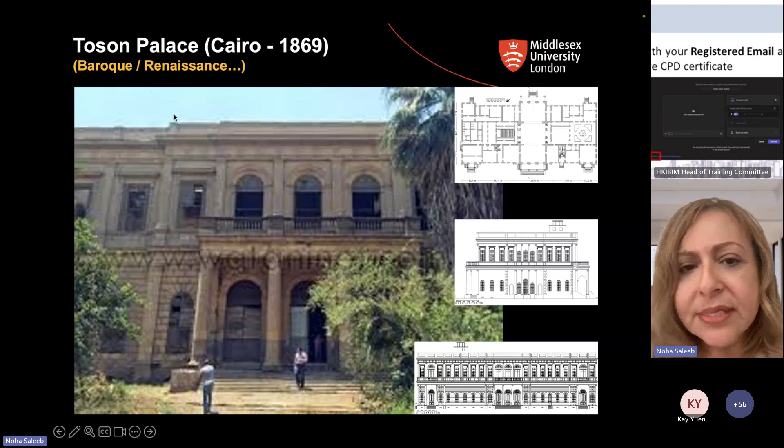And these are just a few pictures of what the palace looked like when we received it. As you can see, it was in shambles. It had been affected by a terrible fire in the early century, and parts of it were completely demolished.

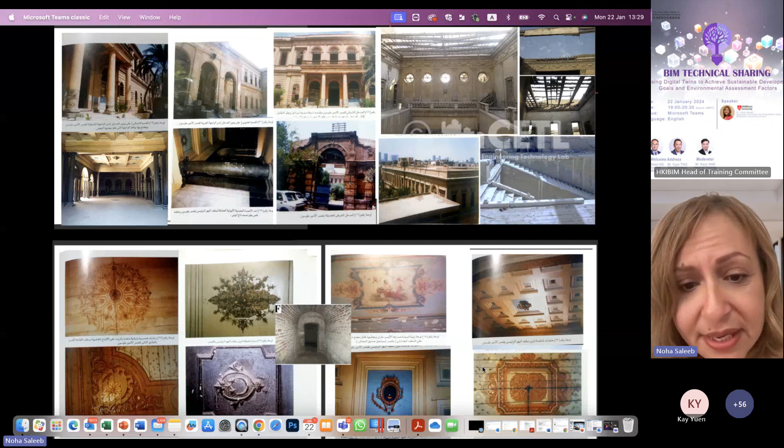Internally, these are examples of the works that are inside it, but a lot of them needed huge renovations.

In addition to that, we had other problems. We had bats and snakes inside the building, deteriorating structures. There was no privacy at all in the building—it was being used by neighboring buildings, and there were huge problems there. So we were basically asked to help enhance all of that using BIM and digital twins.

So how did we go about creating a digital twin? I have written here heritage digital twin, but this is actually the process that I would use to advise people if they want to create a digital twin on any project, whether new build or not. Now, this is a process that we went through, which was pretty cumbersome.

So it had stages to it. First of all, how do you go about defining the IoT sensors that you're going to use inside the physical asset, and how do you connect them in the physical asset? That's a big thing. And then, what is the technology or process used? What software and hardware systems are you going to use? What data are you going to collect? How then do you analyze that data? And how then do you make decisions based on that data and return it back to the physical asset?

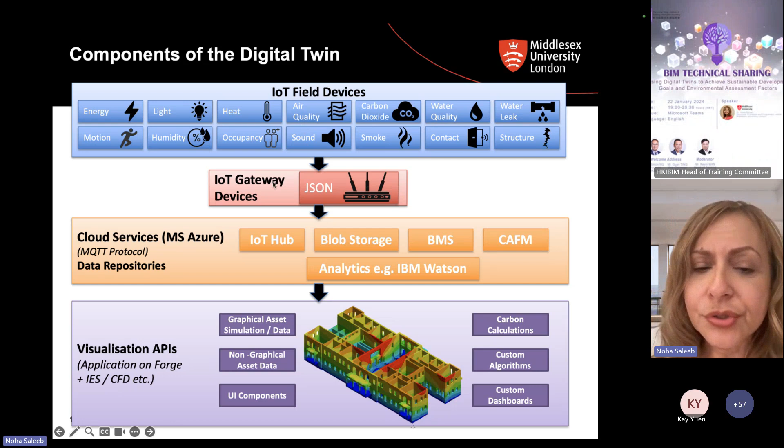But we also made sure there was a feedback loop, so there had to be connectivity back into controlling maybe the lights or the HVAC systems available inside the palace itself, controlling the shades on the windows and so on. These are examples of where we connected the devices inside the building. It was a process we had to go through because we had to decide whether these would be remotely controlled or not, whether they'd have the opportunity to be battery charged if the electricity supply went out for any reason in the building.

What Wi-Fi system are we going to use? Is that going to be local, or like global bandwidth? So we had to go through all of these decisions. Are they going to be connected to a hub on site, inside the walls, or outside the walls? Of course, inside the walls is pretty problematic if you're dealing with a heritage building, but it's fine if you put it into consideration during the design phase of a new build. And hence why I was saying that digital twin can start earlier than the operations phase.

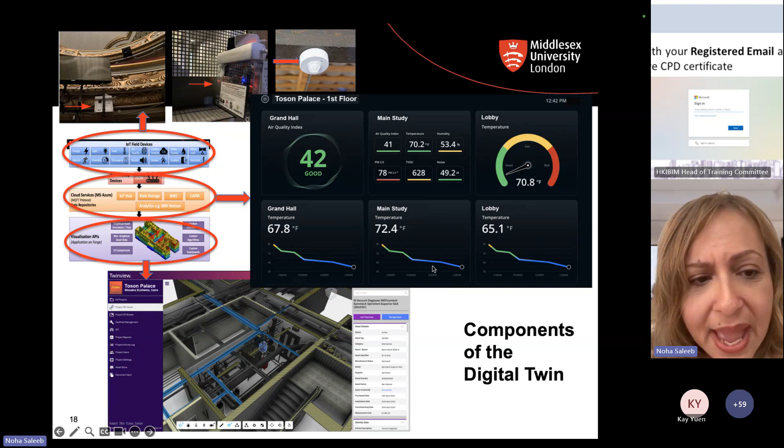These are examples of the interfaces that we had, both graphical and non-graphical. Now I go on to my final part, which I'll probably spend a bit more time on: how we aligned all of that to the UN SDGs. Please feel free to ask any questions, either in the chat or verbally at the end. I'm happy to take any questions.

Let's go back to the 5 main goals I mentioned at the beginning: optimization of the asset, simulation of the asset, the social data of the asset, the management and operational aspects of the asset, and health and safety of the asset. These were the proposed aims or outcomes, but what were the tangible outputs we were expected to produce? In order for this to happen, we created a new heritage classification system, which is non-existent at the moment.

Those of you who deal with technical issues in graphical models probably use classifications like Uniclass, Omniclass, SFG20, COBie. There are many different ones out there, but none of these are suitable for heritage, as I'm going to show you later. So the first thing we created was a classification system useful for heritage.

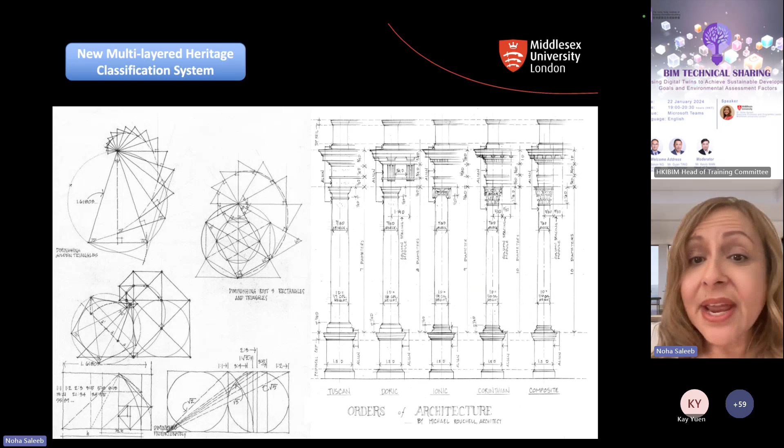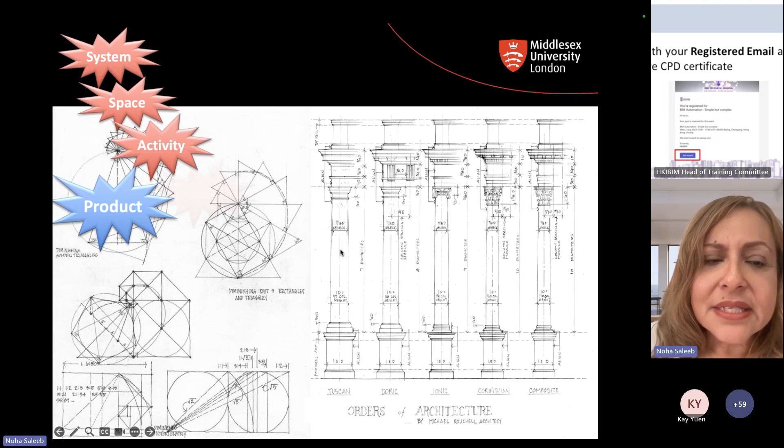Currently, classification systems have the system, the space, the activity, the entity, the complex identified within them, like in Uniclass or Omniclass, in the form of tables—system table, space table, activity table.

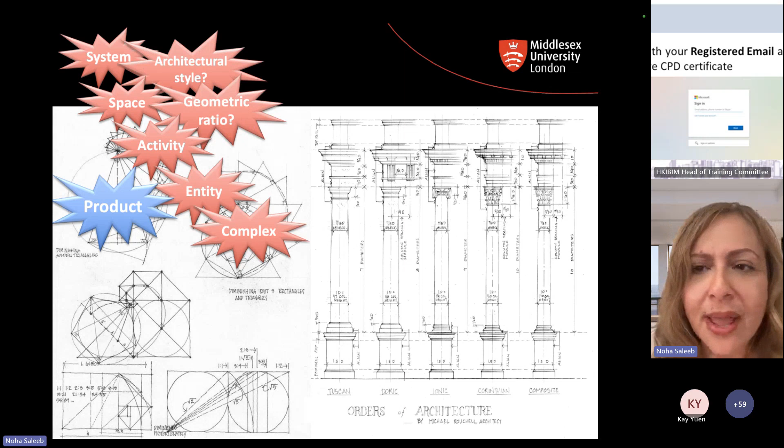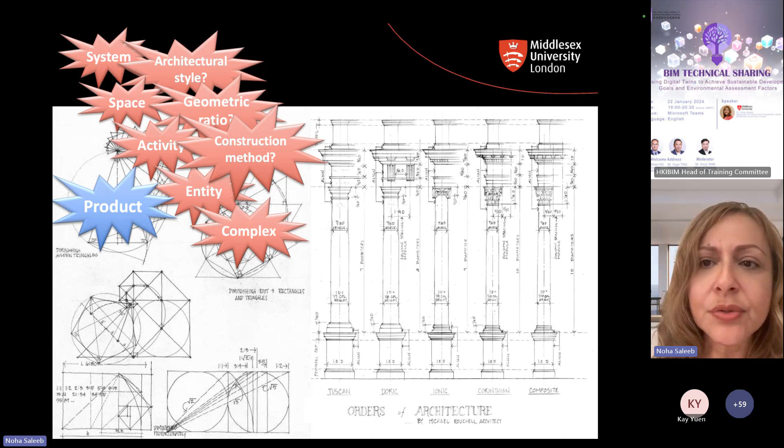The cultural value, the condition—if you want to replace a particular piece in a heritage building with another, you cannot get a piece that's in a completely different condition, from 500 years later, for example. So all of these are examples of attributes that do not exist in current classification systems.

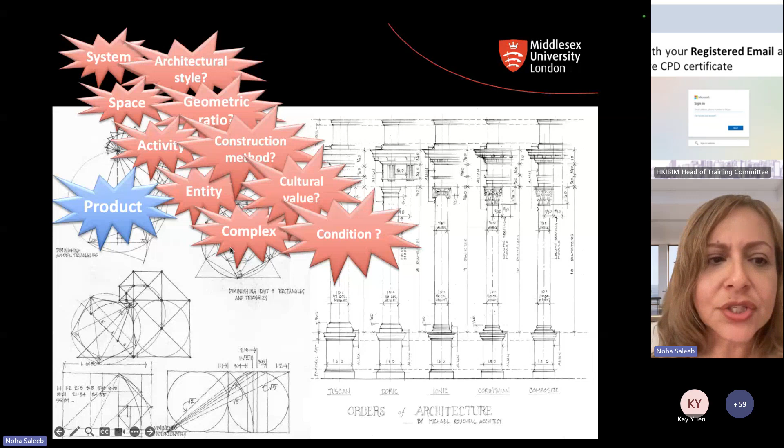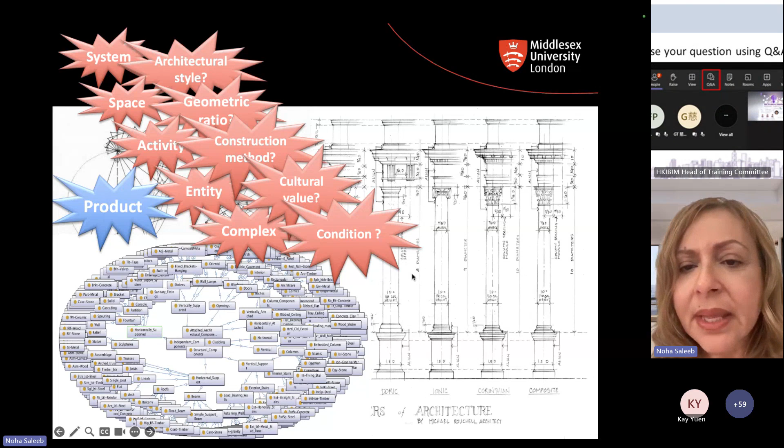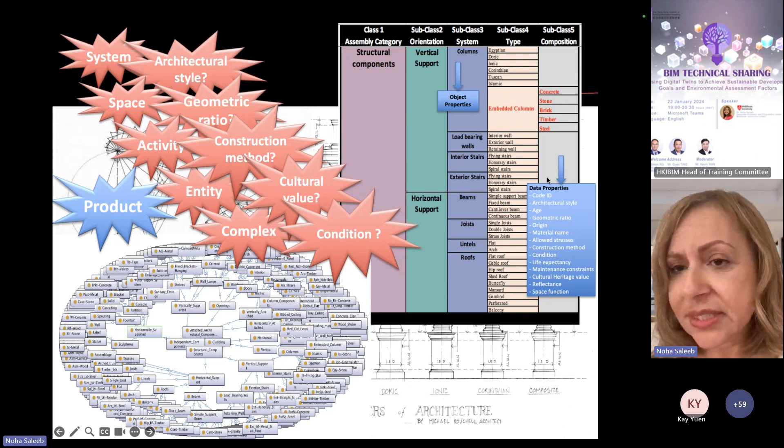Hence we produced a classification system. What you see here is just a representation of the connections between its different classes, and this is it opened up in tabular form, with examples of the data properties we included inside those tables.

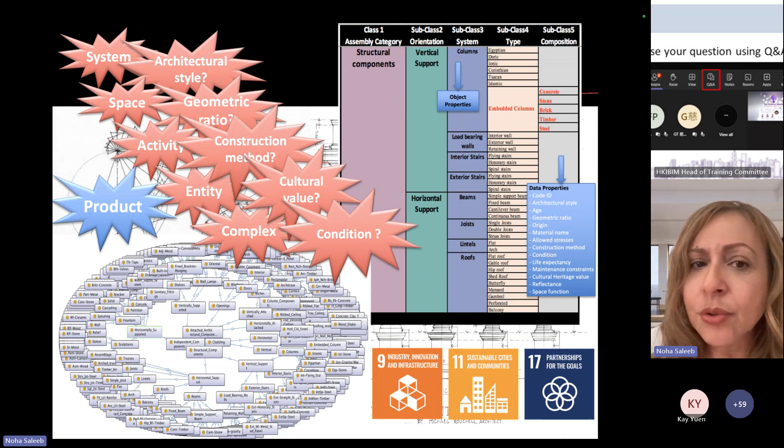We found that this helps us achieve these 3 sustainable goals. It's definitely an innovation, it's definitely used for infrastructure, and it helps us achieve sustainability, because part of these properties relate to sustainable aspects, like the carbon footprint of a component, or the condition and how that connects to circularity. It also helped with partnerships, because we were in close contact with the Ministry of Antiquities and their archaeology teams to help create and manage it.

Let's go on to the second and third outputs, like a framework for structural analysis that we created, and the simulations, virtual reality, and so on.

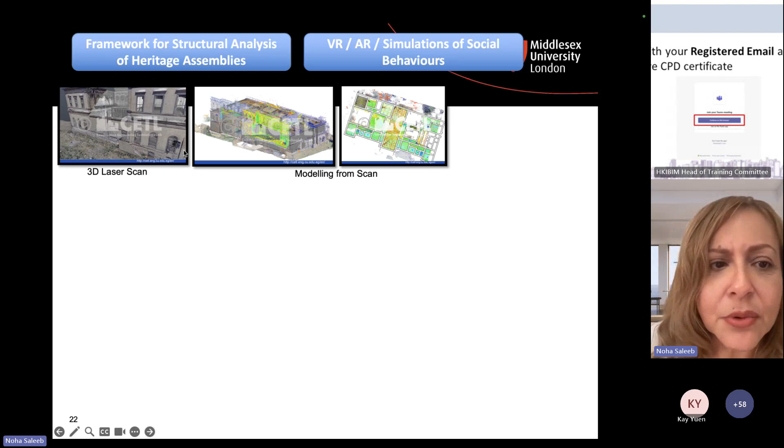These are examples of some of the work that we did, the graphical 3D work, the laser scans, the modeling from the scans, the structural analysis that we performed, seismic analysis, ventilation maps, CFD.

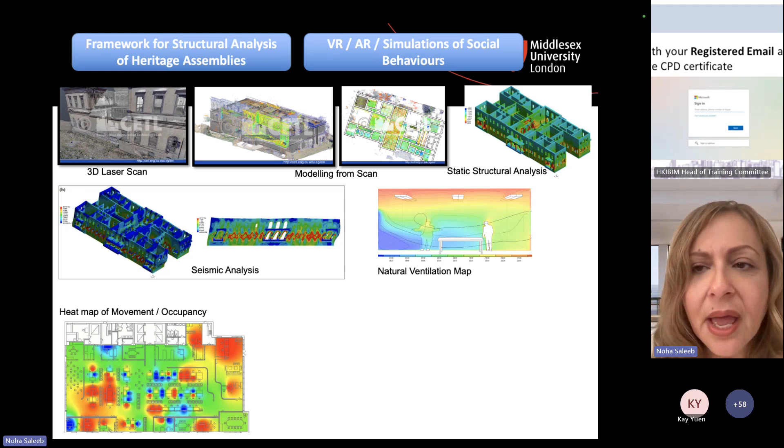Monitoring the heat map movement of people, the occupancy, fluctuations across the day, across the week, across months, especially tourism months. And its accompanying space temperature map as well, because all of these will affect the longevity of the components in the rooms, in the spaces, because of humidity, because of touch, because of so many different aspects.

And we found that these 2 outputs relate to these 4 sustainable goals. Like, how do we have our building sustainable, maintainable for a longer period of time with less carbon emissions and less energy consumption? How do we maintain the health and safety and well-being of the users inside the space?

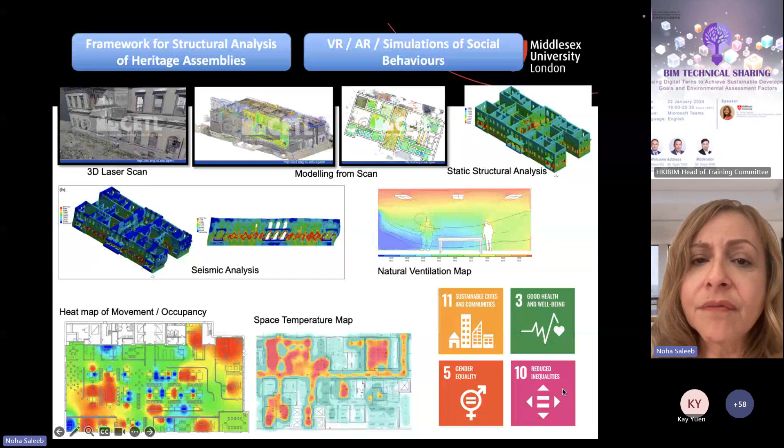Are we using the spaces in a gender equal way? Like, for example, are there enough toilet facilities for both genders? Are there enough prayer facilities for both genders if they are using the building? Are we reducing inequalities in terms of the male to female ratio of managing the buildings at the moment and in future? So these were identified as well.

Now, the last two are related to the visual analytics platform and the expert system. So as I mentioned earlier, we created a whole series of dashboards and visual analytics, both 3D and 2D, that will help us monitor and hopefully control all of these things.

And this is where a conversation about something like solar panels came into play, whether we can install them on the premises and how we can utilize them, or whether we can increase natural ventilation by opening and closing of different openings inside the palace instead of using artificial ventilation.

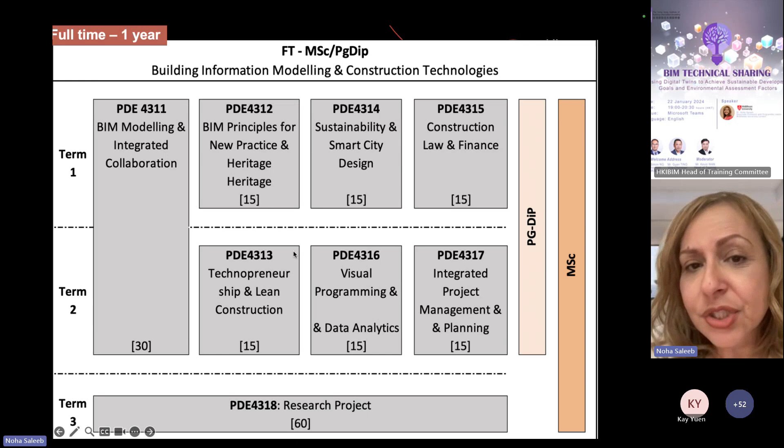And of course, at the end, there is the research project which encompasses all of them. This is an example in the curriculum development of how we aligned all of the UN Sustainable Goals with every single module of the program.

And these are examples of the software that we use in the second program. As you can see, they include a lot of what's being used in industry at the moment, like Autodesk Construction Cloud modules, as well COBie, Plannerly, not just 3D modeling software, but also like Solibri, IES, OneClick, and others as well. And we, of course, provide the licenses for all of that.

Just a word about both programs. As I mentioned, we do not have exams. Everything is taught interactively, but online. So we have several webinars per week with you where we interact with you, see your work, and especially in the second masters, we showcase the work that you've been doing from week to week online. We use Revit or all of the other things, and then we have interactive work between us.

We emulate construction projects. So the projects that we have you work on are real live industry projects, which we ask you to participate in as if you are in a work environment with a team. And there are different critical analysis requirements that are provided by us and industry professionals as well. So everybody who works on this project are people who work in industry, as I will show you later.

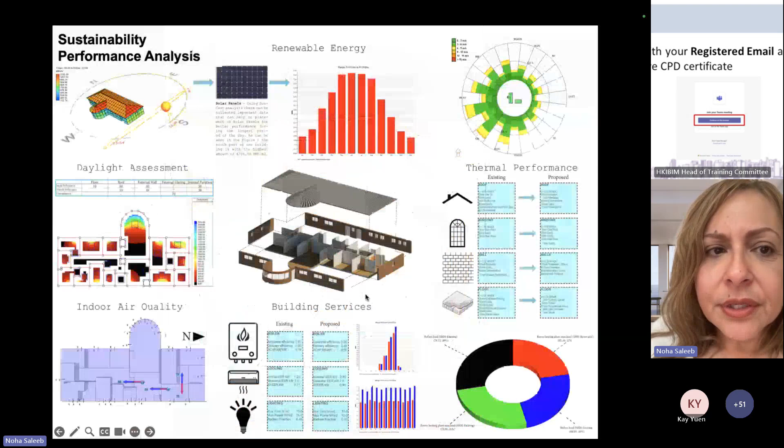And these are examples of the kind of work that you would be producing. Like, for example, these are design things that are produced, construction details, sustainability analysis, scripting, and so on from our students' work as well.

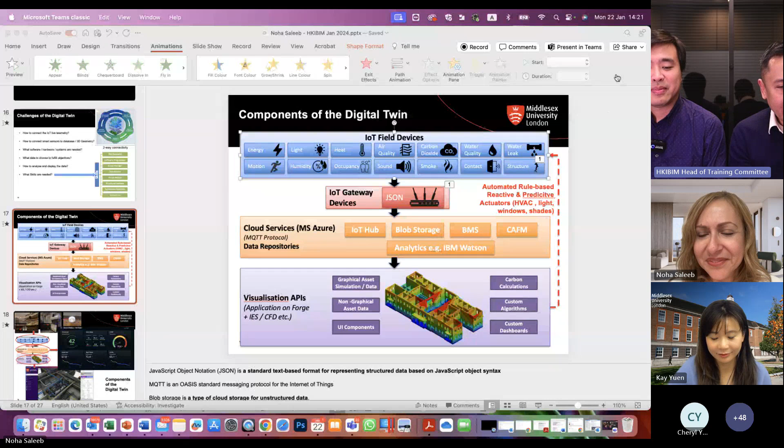Hi, Dr. Noha Saleeb, thanks for sharing your example. I like your examples, especially for the digital twin you implemented in Egypt. It's a perfect example, as Hong Kong's Construction Industry Council has also defined heritage information modeling. This shows members how HIM could be applied. I also like your approach of defining challenges, formulating KPIs, and identifying issues like missing attributes and redefining attributes for middle class. These are perfect examples of the challenges we face while implementing BIM and establishing digital twins.

But from your perspective, you've been doing academia, research, and consulting. So what are the key challenges you've faced with clients coming to you for help implementing digital twins? Share some of the key challenges you've seen from the markets, whether on a global scale or from your part of the world.

Thank you for asking. There are quite a few challenges, as everybody is aware, but the ones I've seen repeated, unfortunately even on mega projects, is that BIM, let alone digital twin, is considered an add-on to the project. It's treated as a tick-box exercise that people need to do, without really looking at it, analyzing it, or even bothering about it right from the start.

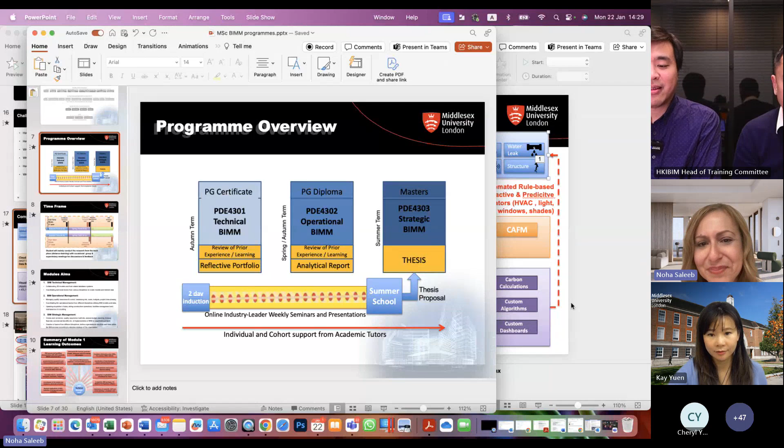Sorry, I interrupted you. No problem. Thank you very much, Dr. Noha. So maybe let me just raise the last question. Could you, Dr. Noha, could you share those two example projects? Are they facing the client? Are they government or private sectors?

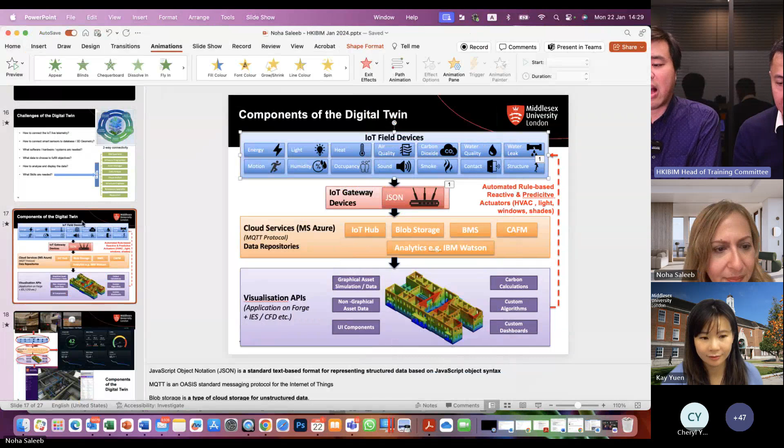The two Fresh BIM and Fresh DT projects, those private projects though in Egypt, are they facing the client there from government? The client is government, yes.

Let me just enlarge this. I'm assuming you mean the two projects that I showed you. The main client was the Ministry of Antiquities, the Egyptian Ministry of Antiquities, represented by the STDF, which is a Science, Technology and Innovation Funding Authority in Egypt. From the British side, the government was represented by the British Council, which funded the project through a scheme called the Newton-Mosharafa Fund, Institutional Links. These were the organizations, public and private, involved, like Historic England, BIM for Heritage, Middlesex University and Cairo University, which were the main principal investigators, and Karnak, which is a private institution as well. So it was a mix between government, private, and higher education institutions.

I see, that's great. So do they have any BIM specification, like an Egypt BIM specification, or do they follow the well-established UK standard?